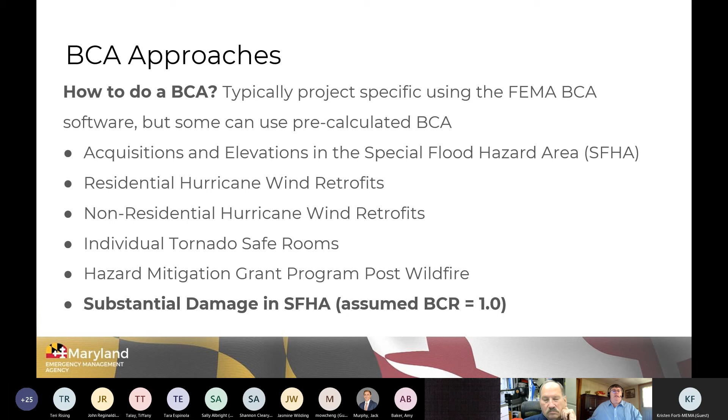Another thing to keep in mind and bolded on this slide is that if you've had structures that have been recently substantially damaged, and it could be from a flood event, but anything that's in the special flood hazard area or the mapped FEMA floodplain, that's another case where there's an actual exemption that would say that a benefit cost analysis would assume 1 on that. So that's something else to keep in mind. If you're in the aftermath of a large disaster and you have a number of structures that have been designated substantially damaged, those automatically could be considered passing for a benefit cost.

So what are some of these thresholds for these pre-calculated benefits? For acquisitions and elevations, there's dollar amounts listed here in this table. There's FEMA memos, and we'll talk about getting a hold of those later on, that talk about what that's applied to. Big thing to keep in mind, especially with an acquisition, is that dollar amount is project cost, not just property acquisition cost. And at times we always forget that it's not just buying the building, but it's buying the land that the building is on.

So if you're in an area, again, think about some of the coastal areas of the state where the structures themselves might not be worth all that much, but the land could be. You still might be looking at a project cost or an individual acquisition cost that would be higher than this threshold. So what these pre-calculated benefits mean is if you have project costs that are lower than the values for acquisition or elevation, you don't have to do a separate BCA. But if they're over that, then you would have to go through the process of documenting it.

And it doesn't mean that, let's say an acquisition for a given structure is $300,000, it won't be cost effective. It just means that you can't be exempted out of doing a benefit cost analysis for those. Then the other category down here, residential hurricane wind in parts of Wicomico and Worcester counties, you've got some values that are also included as part of that. Tornado safe rooms, there are no pre-calculated values in Maryland. If you go further west or in the Midwest, some of those states do have that.

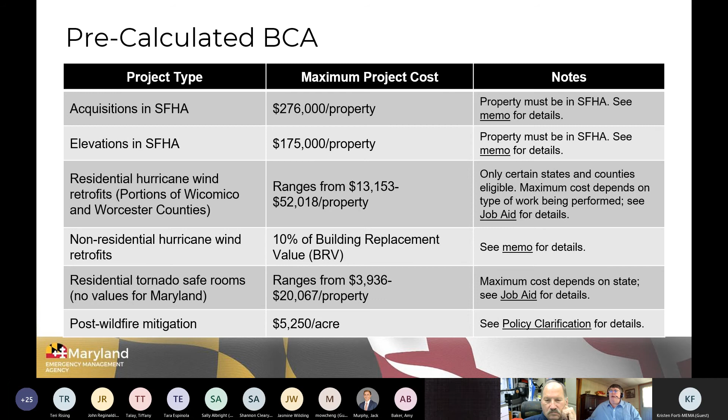So that's pre-calculated benefits. So what are some of the components then in doing a benefit cost analysis? Obviously the cost, benefits, which we'll take the deep dive in, and then some other factors which I've kind of lumped in as economic calculations. So the math that goes into actually being able to come up with a benefit cost ratio. And the three main factors are the discount rate, the project useful life, and this idea of a project design or recurrence interval associated with project effectiveness. So we'll talk a little bit about how the project useful life and that project design are a little different and sometimes get confused.

A big part of that, and often as a reviewer where there might be some challenges, comes in with maintenance costs. Let's say you're doing an acquisition where you're actually buying a house and getting rid of it. With projects like that where you're removing something, unless it's a special case, usually you're not going to have a whole lot of maintenance afterward. But with a house elevation, you would want to do some level of maintenance over time, making sure that the foundation is settled correctly and, if it's a block foundation, that you don't have differential settling. If you're doing a project like a flood wall or something that has moving parts, then that probably needs annual inspections and other sorts of things.

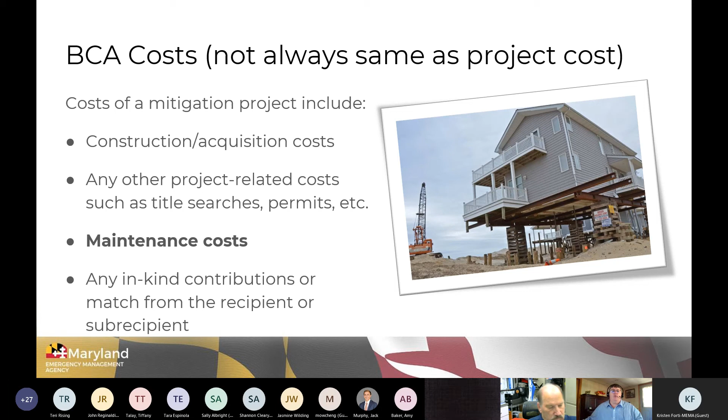So the cost, so let's say you're applying to FEMA, total project cost is $2 million. If you add on additional maintenance costs in the benefit cost, the value that's shown may be $2.2 million. It may actually be more than what you're applying for to FEMA because you've included maintenance. So that's something to keep in mind, that in benefit costs, those maintenance items get added in even though you're not applying to FEMA for those dollar amounts. So that's the cost side of the equation.

A major concept and a place where, as a reviewer, we often see folks not give proper documentation is they're very tempted to have the losses after mitigation just be zero for every size of event. Very few projects are 100% effective across all sizes of storms. So usually, let's say you're putting in a new culvert, and the old culvert was sized for only a 10-year storm, and now it's good for a 50-year. Well, if you have a huge 100-year, 500-year storm, having that culvert slightly bigger is really not going to have that big of a difference at a really major storm event.

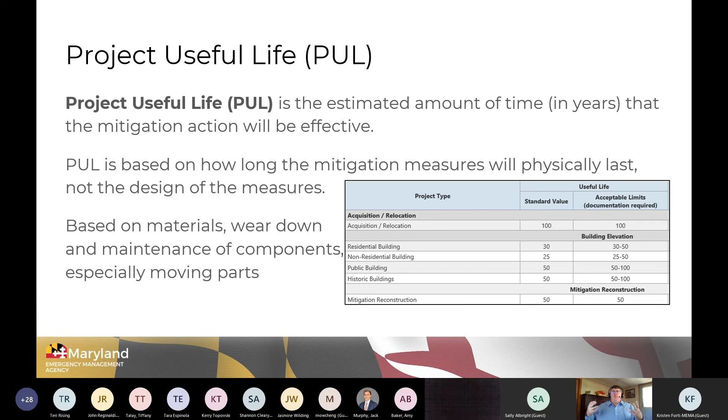So think of project useful life as how long the practice will last. That is different, though, than project effectiveness. So think about a highway box culvert: it may have a project useful life of 50 years, but this culvert that you're designing may only pass up to a 25-year return period, or if you're familiar with some of the new language for that, a 4% annual chance.

So project effectiveness deals with the hazard and how well a given project will withstand certain levels of hazards. With flooding, that often comes back to a flood elevation or a flood depth. With wind, that comes up to a wind speed. So a more severe event would have higher wind speeds. So for instance, when you put shutters on, are they designed for 90 miles an hour, 100 miles an hour, 150 miles an hour? That will then determine its project effectiveness.

So you could have examples where, like with this culvert, the project effectiveness or the return period is less than the project useful life. Or you could have a residential house elevated, project useful life is 30 years, but you're elevating it to the 500-year return period flood elevation. So here's an instance where the effectiveness value or the return period is higher in terms of years than the project useful life. So it can get confusing. The way that I keep track is project useful life is simply how long the measure lasts. The project effectiveness goes back to what the design is and what we're trying to prevent.

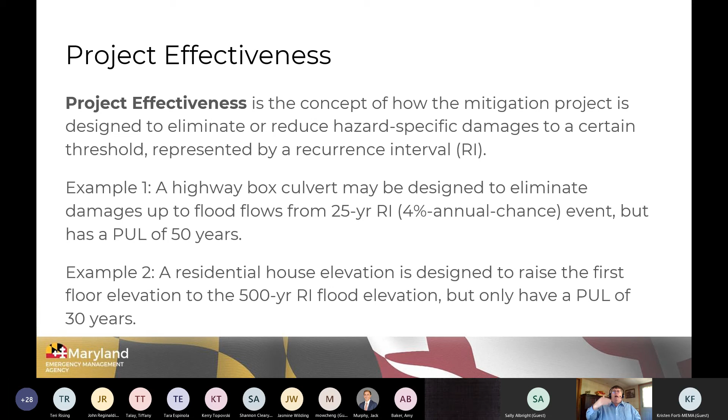And this project effectiveness is really what drives all your benefits. Because in the culvert case, if you're only putting in a culvert that will carry up to the 25-year event, I would expect in the benefit cost analysis at the 50-year, the 100, the 500, to see no difference with that culvert in place, or very small difference, because it's only designed to carry that event. But for a 10-year or the 25, I would see a difference in before and after damages. So that's where this project effectiveness, how it withstands that hazard, is really the driving concept behind documenting and supporting a lot of your benefit calculations.

All right, so benefit types. So the concept to keep in mind with benefits, again, we talked about avoided damages, is it really starts at the physical damages to either a structure, or in the case of life safety, to people. So it starts off with, this hazard has occurred and it breaks something.

In the benefit cost software, the two main categories of physical damage that are almost always assumed are the building, so the actual framework, foundation, roof, those fixed permanent parts of the building, and then the contents of the building. So those are the two primary physical damage types that are included.

And then that damage then causes what? Well, let's say in the case of the graphic that's shown here, this house had 30% damage. People are going to have to move out of that house for 4 or 5 months as repairs are being done. So that comes back to displacement cost. Let's say that this isn't a residential house, but was an actual business. Well, that business has to close now for 4 or 5 months. So you would have a loss of service or a loss of function associated with that.

Certain hazard types allow you to also do life safety, avoided injuries or deaths. I will say this, for most wind and flood events, you don't have these included because of warning time. So usually if there's considered sufficient warning time, those aren't included in a benefit cost. You can imagine for something like a tornado safe room, the whole house disappears and all that's left is the safe room. That's where life safety really comes in.

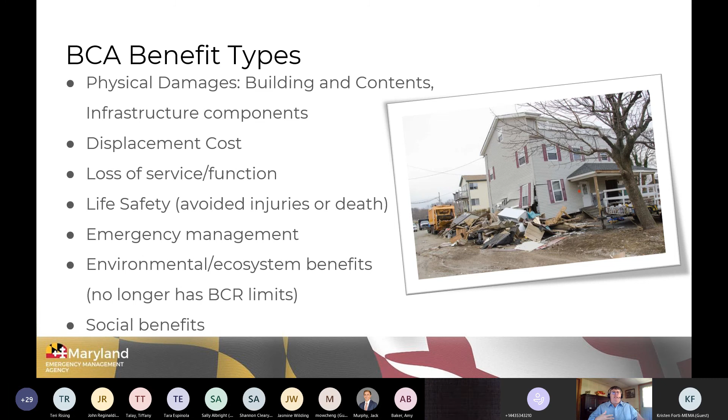Many parts of the software, and if you ever do the longer training or you download the training from the FEMA website, things like loss of function and service, life safety, there are default values built into the software for a lot of these things, so you're not having to guess at this stuff. So that's one thing to keep in mind. Say you're wanting to do a generator project and you're like, well, what's the dollar amount associated with power outage? That's something that there are default values built into the software that you can leverage and take advantage of.

All right, so how does this work within the software? How are the project types laid out? So when you go into the tool, and you'll actually see similar menus in both the BCA tool and also in FEMA GO, you've got kind of a structure type, whether it's doing something to a building or utility or roads and bridges. So you pick your structure type.

Depending on this choice, you'll then have a choice of all these different hazard types. I'll focus today on flood and wind, but depending, like roads or utilities in the Midwest, you think about your ice storm type of thing. If you're proposing a project to strengthen power poles, then you would pick utilities, and then only a subset of these would come up. And again, you would have to have detailed information about how you would have less power outage with these strengthened poles. But again, that would be an acceptable project type to include.

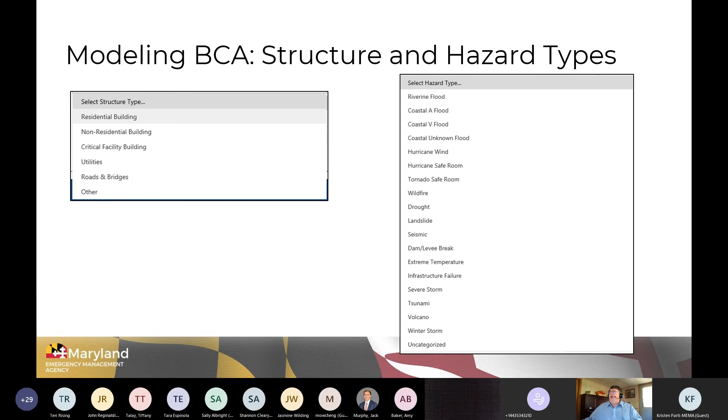All right, so for flood benefit cost. So what are the major types of projects? You can group these in three major areas. So acquisition, you're actually buying properties, removing them. Elevations, you're taking that first floor and raising it up, so you're having lower flood depths when events occur. So these two types, the acquisition and the elevations, are looking at avoiding damages by changing what gets damaged, either by removing it entirely or modifying it in such a way that it's damaged less often.

Flood control projects, on the other hand, and flood control sometimes can also include things like flood proofing, where you also put coatings on buildings and stuff. But usually flood control is doing structural things, you can think of flood walls or berms, or even rerouting rivers or streams. So you're actually changing the hazard itself. So flood is one of the few natural hazards, especially if you're in an area that's primarily dominated by local drainage, where you actually have a chance to alter the hazard itself.

But again, thinking of Maryland, in coastal areas, there's not a whole lot you can do against coastal surge, and even coastal flood walls are only effective up to a certain limit. So those are other things to always keep in mind, that each of these project types often will have a limit to their project effectiveness, what they can and can't do.

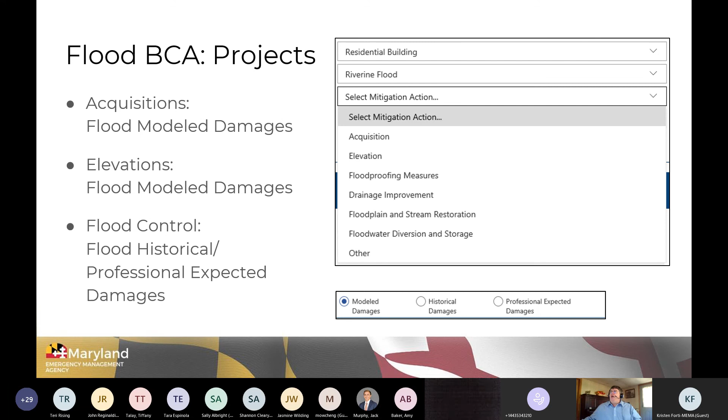So what I'm going to do is go through a couple of these major project types, and then also show you some, but not all, of the major data needs that you might have for each of these project types. So for acquisition, it's the purchase and demolition of a building. Sometimes you can also relocate it if the building is still sufficiently put together and can be moved. You do have to have caution with that.

I will say that I have seen graphics in areas where they go to move a house, but it's in an area where you have to cross roads that have smaller bridges that may not be strong enough to withstand the weight of a house crossing it. So I've seen instances where the bridge collapses under a moved house, and now the house has become the bridge over top. It's pretty sad. So it's a lot of work to actually do a relocation of a structure, but again, it is a possible thing.

The nice thing when you do these acquisition projects, especially if you get full neighborhoods, is you then can convert those areas into open space, into parks, multi-use. One of the big things to always keep in mind with acquisition, though, and FEMA requires this, is that they are then deed restricted to be open space in perpetuity. So whoever ends up owning those properties after the project is done, the community or the county, that's yours to take care of and to keep in open space. FEMA doesn't want new buildings to go back in those sorts of areas.

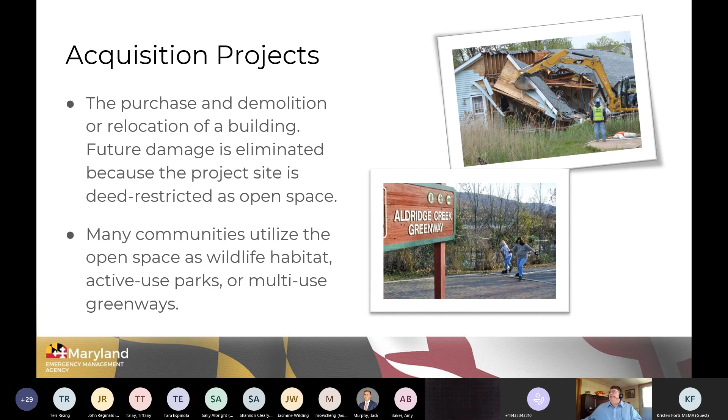So what's a critical data thing for acquisition? The big one by far is the lowest floor elevation. So in order to get a cost-effective project, the way the math really works is that the lower the building is and the more likely it gets flooded, the bigger the benefit by removing that building.

What are some good sources for that lowest floor? Ideally, you would have what's known as an elevation certificate. Those are FEMA standard documents that have a very regimented way to have a surveyor get information about ground elevation, building elevations, and not just a single elevation in a structure, but multiple elevations dependent on the way that the building's foundation works and whether it has a basement or a crawl space or slab on grade. It measures multiples of those, and that gives a really solid documentation.

In addition, elevation certificates include photography of every side of a building as well. So as a reviewer, if someone wants to buy out a house and they include a recent or a brand new elevation certificate, that's kind of the gold standard to know they did their homework and they figured out this house right now is getting flooded by 5-year events, and by removing it, we're avoiding that amount of damage. To me, it's probably the most critical one for acquisition and really elevation projects as well, having that level of detail and having it well documented.

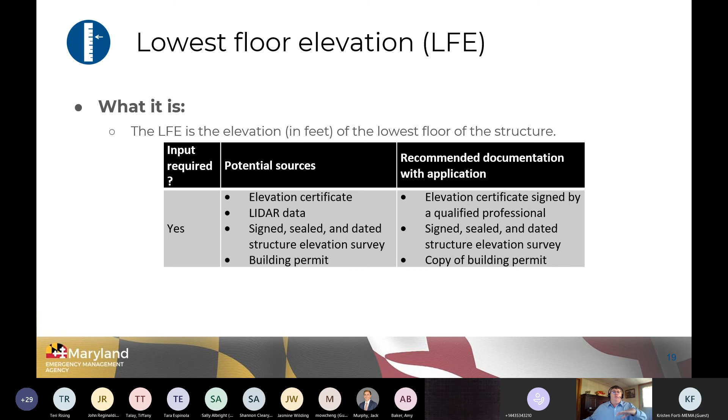So elevation projects, that's kind of a step removed from acquisition. We're not removing the building, but we're lifting it up. And we're taking it above, at a minimum, the base flood elevation or your standard 100-year elevation or the basis for your FEMA flood maps. Those are all kind of interchangeable. But getting a building elevated above that, and in Maryland right now, based on building codes, many areas within the floodplain already have a requirement of what's known as freeboard, so feet above the BFE. So there's already requirements of at least a foot minimum freeboard based on building codes.

But in certain communities, especially communities that are part of the Community Rating System, you may have a freeboard requirement of 2 feet or 3 feet, so even higher. The great thing about elevation projects, especially on older properties that were built at or close to grade, known as pre-FIRM structures, is you could take a building that's getting flooded from, let's say, 10-year very frequent events, and raise it up high enough that it's going to be avoiding damages from almost all flood events.

Again, elevation projects aren't foolproof. Even elevating it up a couple stories, you can still envision instances, especially if you're right on the coast, where events might be severe enough that it would still cause issues. The other thing with elevation projects is, in a practical sense, while folks like that idea of riding out the storm, there's usually a case, because of lack of electricity and food and other things, where you might have to evacuate folks from elevated buildings. So that's another challenge with those project types.

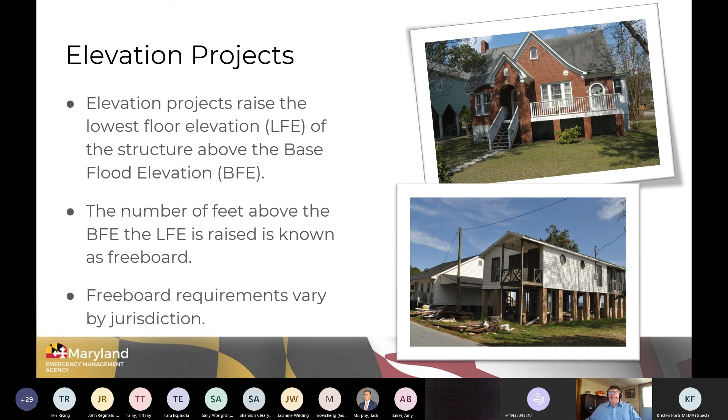So what's a critical thing for this project? In addition to knowing what the first floor is, also knowing the number of feet that you're raising the building. So the elevation certificate says my building is at a certain height, and now I'm raising it 2, 3 feet, 4 feet. What's that amount to get it above certain flood heights?

In order to derive how many feet to raise this, you would need to know about building codes, the detailed flood profile of the area, and also how feasible it is with the foundation types that you're looking at. If a building's already on piers and piles and you're taking it up and replacing it with newer ones, that's a little different than a building that's currently on, let's say, cinder block walls and having to convert to different foundation types.

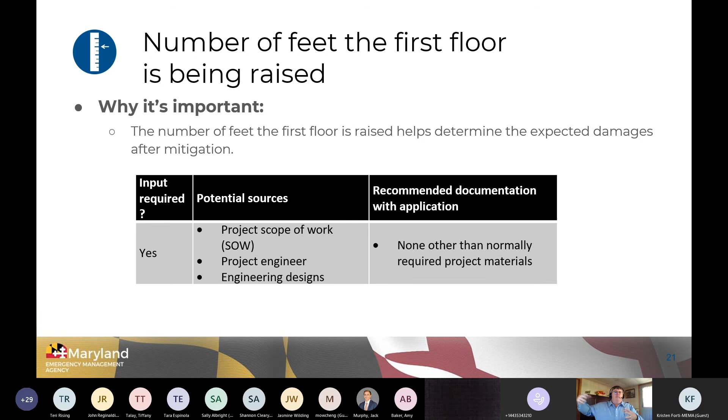All right, flood control projects. This is kind of a lump of a lot of different project types. I talked earlier in the talk about culverts. You can also think about flood walls. Levees are more common in the Midwest, but we do have them here in the Mid-Atlantic as well. Critical facilities like water treatment plants or wastewater treatment plants often will have ring levees just because they tend to be located next to water bodies.

One thing to keep in mind with these projects, let's say with a flood wall, is it's really great at preventing the more frequent flood events from causing damage. But then there's a point where the water goes over the top, and then it's as if they aren't even there. So that's always one thing to keep in mind in a benefit-cost analysis. I would expect the after-mitigation damages to be really low, and then when it reaches that threshold, it's going to go over, and that wall effectively is not there for really high events.

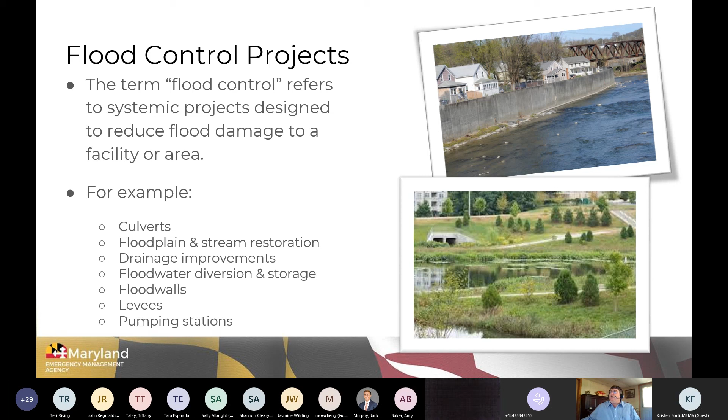So in documenting flood control projects, really the critical thing there is damages before and after mitigation, being able to document what you're seeing and what you're not seeing. So those are flood control.

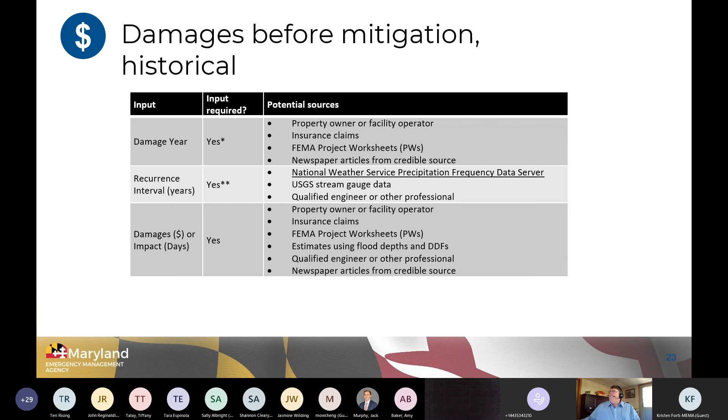Hurricane wind, I would just say, is one of the big project types, and if you guys are looking at the categories they have are shutters, load path, roof retrofit, code plus. Don't have time to get into a lot of it. I'll just talk real briefly about shutters.

So what are shutters designed to do? So their design is really to help prevent damages. And in a lot of hurricane wind design, this idea is you want to maintain the envelope of your building. And often windows are a weak point in addition to the roof as well.

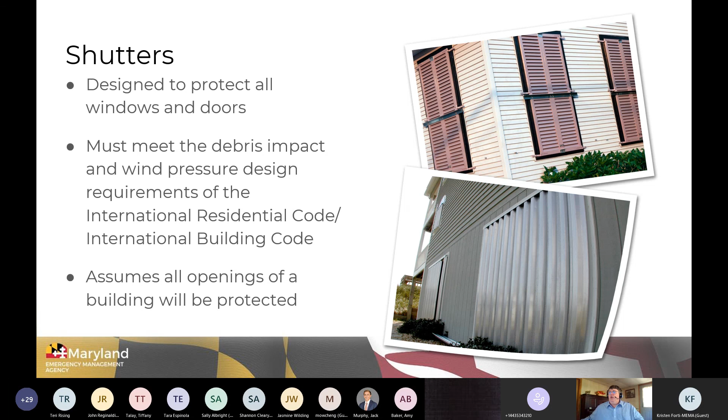So what is a critical thing for shutters is really understanding the before and after building properties and what those shutters are designed for. One thing as a reviewer I've often seen on shutter projects is they want to install them in an older building and say, oh, these shutters are designed for 120 mile per hour winds, but then your roof in an older building is going to get ripped off at 90 miles an hour. So it doesn't really do you much good if the rest of the building is weaker than this new thing you install.

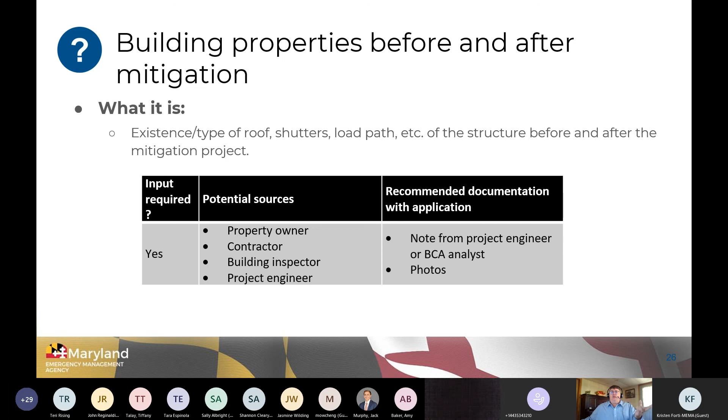So retrofitting structures and adding things like shutters often can be a challenge on an engineering basis, improving and supporting that sort of info. Just repeating on this slide.

And that's where talking with the state can really be helpful as well. If you're, let's say, like that electrical system thing I mentioned, or wildfire, or some of the ones that are a little less typical of what's needed as part of those benefit cost analysis.

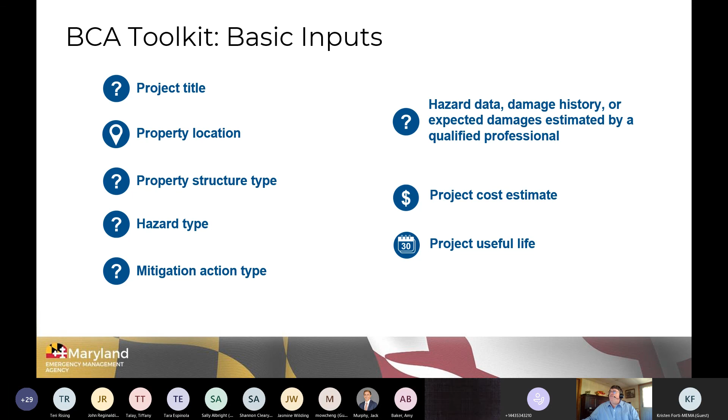It then asks you in the benefit cost analysis for some background information, has drop-down menus for project types, mitigation types, some of the cost info. Notice your project useful life. Couple things about the toolkit if you've worked with it a little bit.

So in each of these major sections of the software, if I zoom into this corner, it has this little i for additional info. It'll pop up an additional screen. And then if you go on one of these little buttons here on the side, it'll expand out. And that's actually where I got this project useful life table from before.

Anything in the software, all of this information gives you default values and is a real critical place that if you're going into this and you're just trying to make initial guesses at things, this can give you some of the critical information to use.

Also, if you want to add comments next to some of these values to say, where did I get this information from? Initially, these comments are kind of a white button. And once you populate it, it then shows as blue. But I can type in here, okay, where did I get my project cost from? Oh, detailed project cost is in the cost estimate attached to the grant application.

So this allows a reviewer to have additional information as they're going through and saying, where did this value come from? They can have this comment to help lead them along in knowing where this information is from.

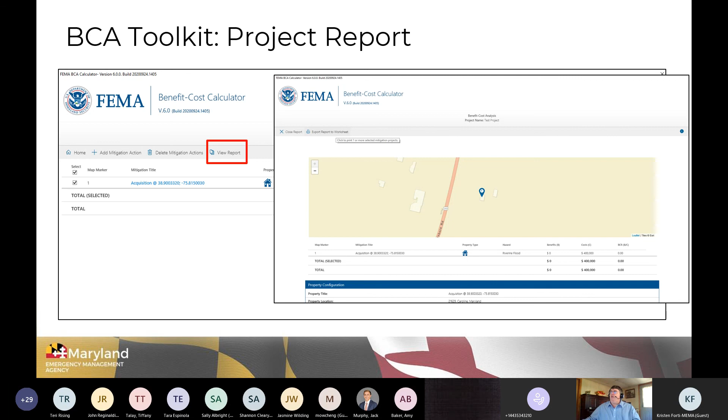FEMA Go also wants you to put the project report in. So the report is kind of a PDF formatted printout of all the values that you entered, along with those comments and additional info you might have included. And then the third thing that FEMA Go would want you to have is data documentation.

The key thing to keep in mind with this is that every input you put into the software needs to have documentation. Whether you used a standard value, something within acceptable limits, you have an additional engineering study, all of that information has to be supported and documented. Assume that the reviewer isn't going to sit there and go through every study and every attachment in your grant application. You need to have a separate document that steps them through.

Cost is here, project useful life is this assumption, before damages are coming from this, after. Take them through every single input so that they know that you've documented and supported that information that's there. So every project, every structure, every input has to have this documentation included. All right, so that's the software.

How does this work in FEMA Go? So in FEMA Go, there's two places where benefit cost info goes in. One is under the cost effectiveness section, which has you choose what basis you use for benefit cost, has some additional information to fill out, and then at the end asks for those attachments that I had mentioned earlier. So that's where you would attach the benefit cost tool export, the report, that supporting data documentation.